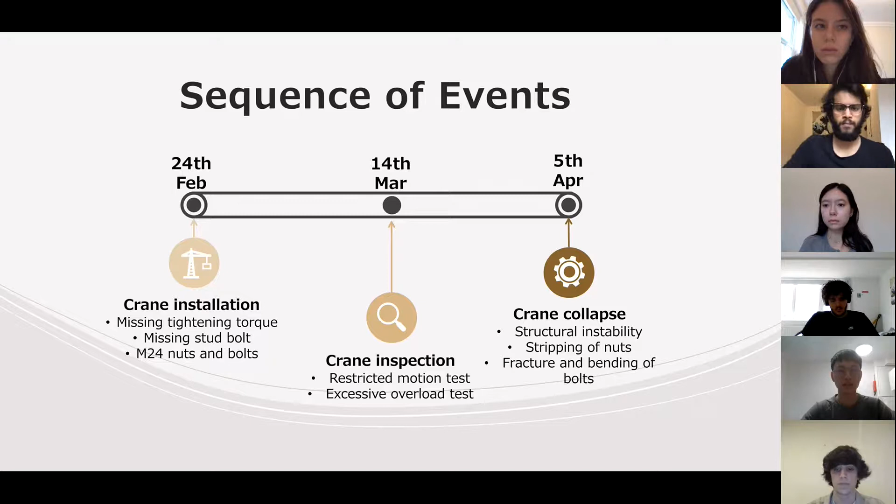On 5th of April, around midday, during lifting operations carried out by the crane operator, Mr. Tatton, the crane fell and injured the operations manager, Mr. Vance.

In studying the cause of the crane collapse, several factors were analyzed. Force and moment calculations showed that the crane was not overloaded at the time of the incident, thus should not have failed at the weight lifted. Checks on the tightening torque used on the bolts showed that the bolts were sufficiently preloaded to a value of 135 kilonewtons, which is greater than the incident load of 120 kilonewtons.

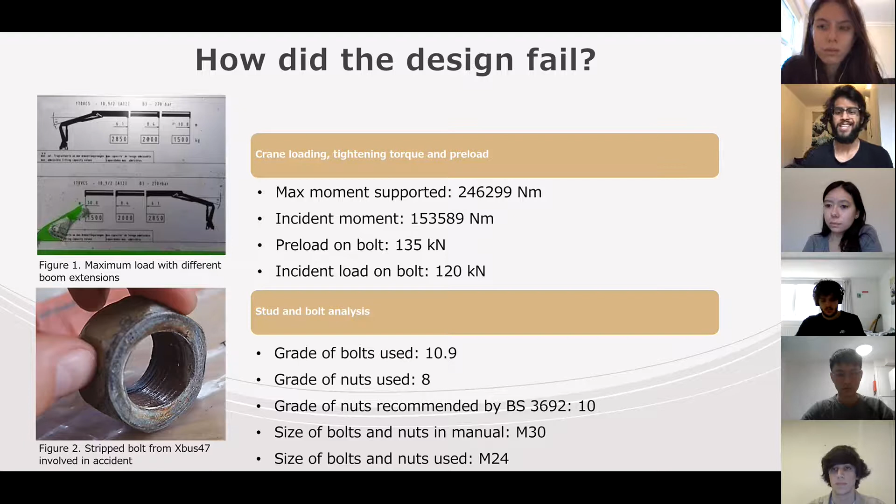Looking at the bolts and nuts used, it is found that the grade of the nut used for the bolt was not in compliance with national standards, as a lower grade of nut was used with a higher grade bolt. Furthermore, the size of the fasteners used were not the size indicated in the installation manual. It is concluded that these factors caused a chain reaction which led to the collapse.

Regarding the maintenance and operation of the crane design, the crane inspector carried out an overload test with a load of 2,000 kilograms, which exceeded the intended load by 125 kilograms, possibly contributing to the failure of the nuts. Also, the bolts did not get retorqued following the overload test, causing possible loosening of the nuts, followed by reduction in their preload values.

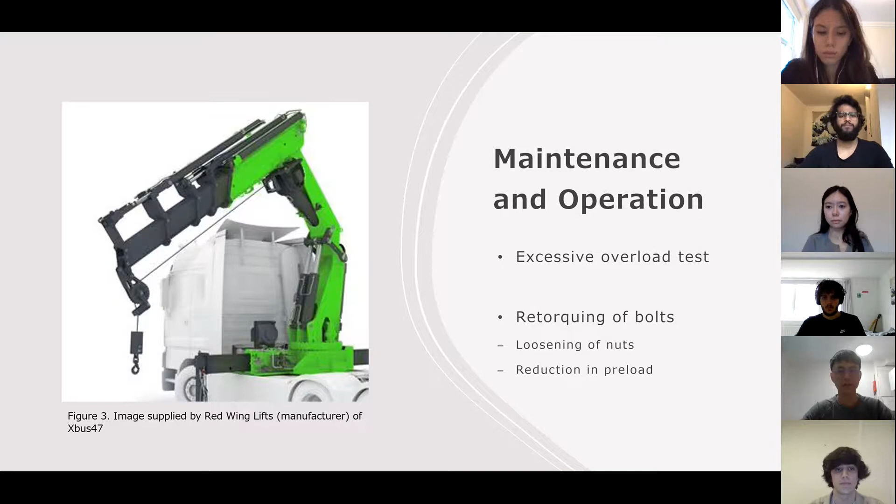Furthermore, for the legal aspect, we assess Xbus47's compliance with the Lifting Operations and Lifting Equipment Regulations. We concluded that the main regulations not complied were Regulation 4, being not to exceed the limits of strength or stability of the lifting equipment. This was not complied as the crane's new base was installed on the old plinth without checking the integrity of the original structure. Additionally, Regulation 8 clarifies that each lifting operation needs to be planned, supervised, and carried out safely.

This was not complied as the crane was operated while the driver and Mr. Vance were under the load and the maximum load limit was not reduced to a safer limit as asked by Hytrick Crars. Finally, Regulation 9 requires all lifting equipment to be subject to thorough examination at various points before being used. This was not complied as Xbus47 was used before commissioning and Mr. Striple, being the competent person, did not properly check on torque or bolt suitability.

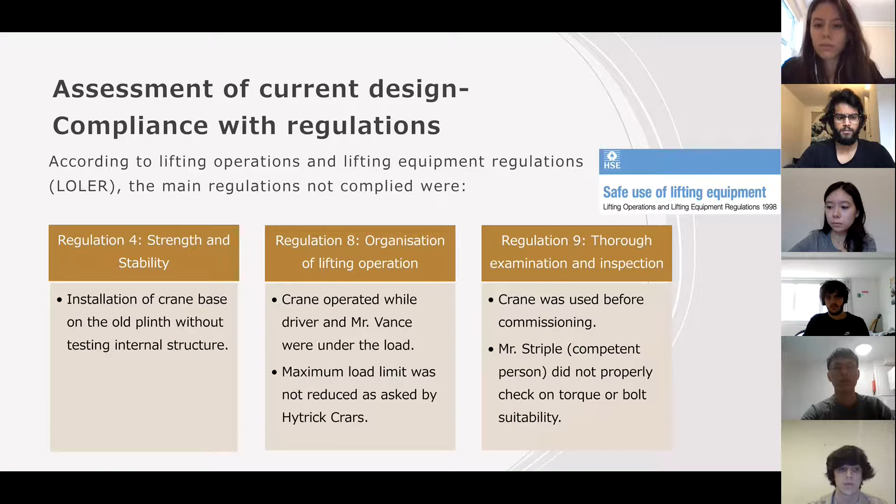A new PDS was created where we will talk about 5 main aspects of this new design. It must offer a better stability on the base, as well as safer working conditions. It should be installed when Hytrick wants to continue those operations. Safety is an important factor. Indeed, we considered the risk on the workers' health, and to answer to this criteria, we created an extended safety zone with a fixed radius.

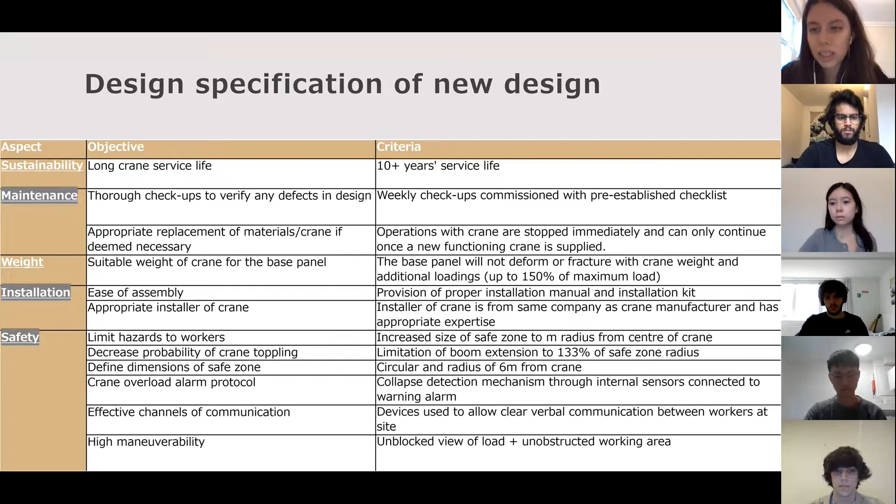Then, the new design will depend on its installation. It must be easy to assemble with fixed instructions and measurements. The maintenance must be considered, and it must be verified through checkups with a pre-established checklist. Furthermore, commissioning is crucial as lack of it can cause failure of a crane. Different objectives can be set, such as realizing to full extent different tests, such as the 360 range motion. Finally, the performance must be considered, such as setting a precise load capacity without overloading the crane.

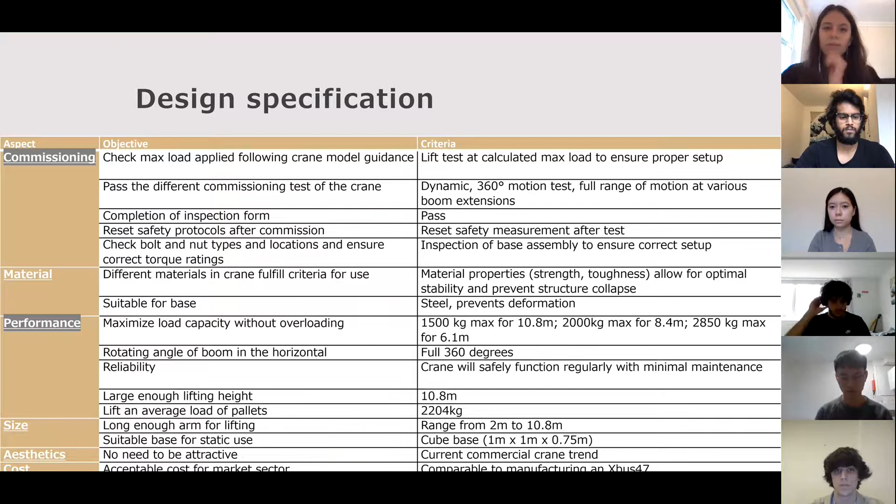When we were looking at our old design, we found that the main issue was the dependence on the bolt joints for stability. We therefore decided to add hydraulic stabilizers so that the weight of the crane and the load will be distributed between the four stabilizers as well as the bolts. The hydraulic supports are composed of a piston mechanism, which also has a pressure gauge linked to an alarm system.

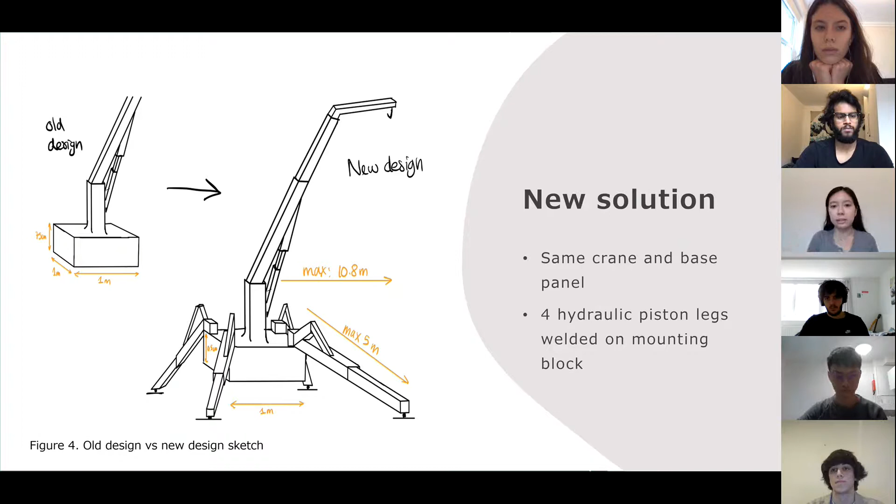As we want the solution to be safer, we wanted to check if the four stabilizers would be able to hold the full weight of the crane and the loads if the bolts were to fail again. So here's our free body diagram that we use for our calculations. We can see that we simplified the crane, and we now have three different weights. Weight 1, which corresponds to the mounting block, which is made of steel. Weight 2, which corresponds to the weight of the crane. And weight 3, which corresponds to the weight of the pallets.

We can also see theta 0, which corresponds to our boom degree angle, which is in the middle of the diagram. And we can also see that we considered four normal forces, drawing them such as A is composed of A1, A2, B is composed of B1, B2. Our measures are these specific distances because we considered our new safety measures. So this scenario is therefore in the case where the boom of the crane is at its maximum length of 10.8 meters.

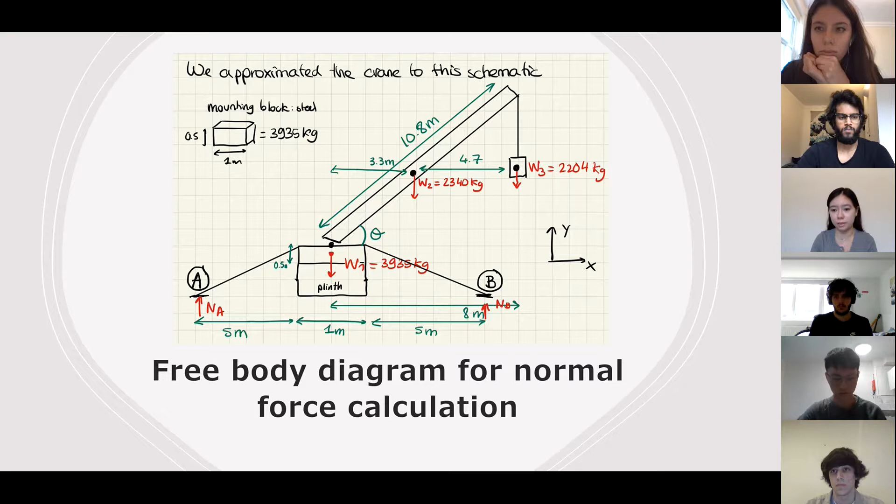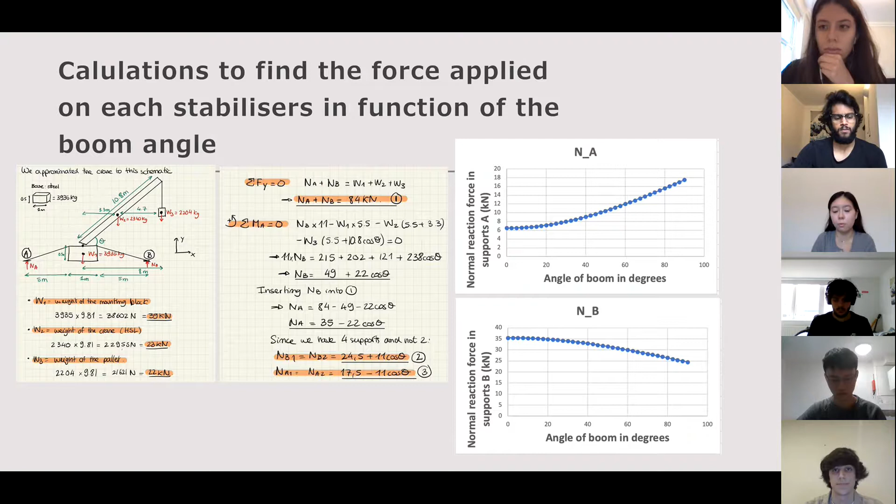We then proceeded to find the reaction forces and moments in A equations. From those equations, we then obtained the equations for the forces applied at each stabilizer in function of the boom degree, which is what we plotted in the graphs. The new design uses a hydraulic system to fix the displacement of the crane. It relies on the use of fluid pressure to transfer force to extend and retract the legs as necessary. The system is further capable of withstanding shock loads without moving the leg, thus can act as a stabilizing system in the case of failure.

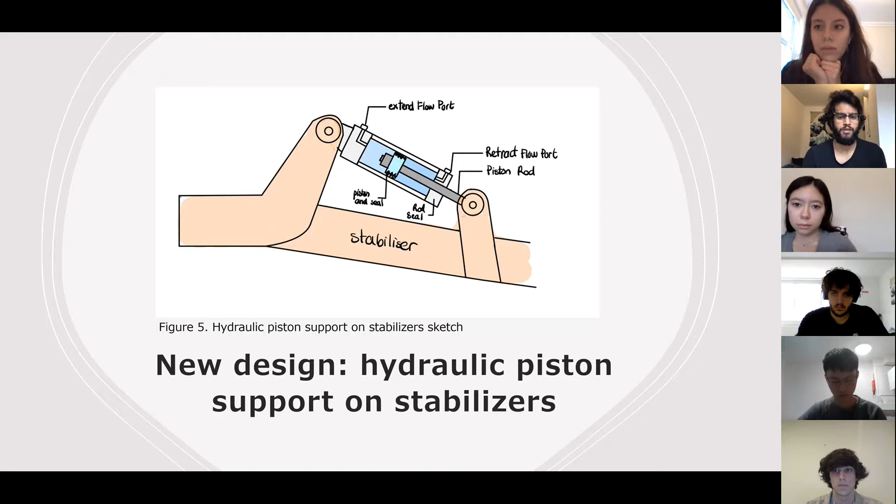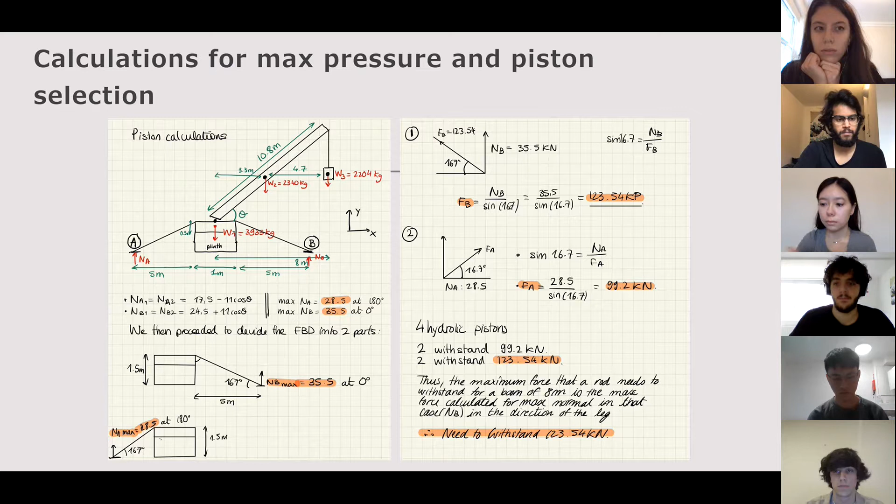So as we can see, for the calculations for maximum pressure and piston selection, we have to resolve both the normal at A and the normal at B into resultant forces into all of the legs. As such, we were able to calculate the maximum force that would be experienced by the leg to be 123.54 kilonewtons. Thus, the maximum force that the leg would withstand is 123.54 kilonewtons. Therefore, we selected a hydraulic piston accordingly.

We used a piston bore diameter of 0.1524 meters, and as such, we calculated the maximum pressure in the piston to be 67 bar. Existing hydraulic cylinders can handle a pressure of 210 to 690 bar, and specifically the Parker HMI, which we selected, operates at a max operating pressure of 210 bar, which is more than enough for what we actually need.

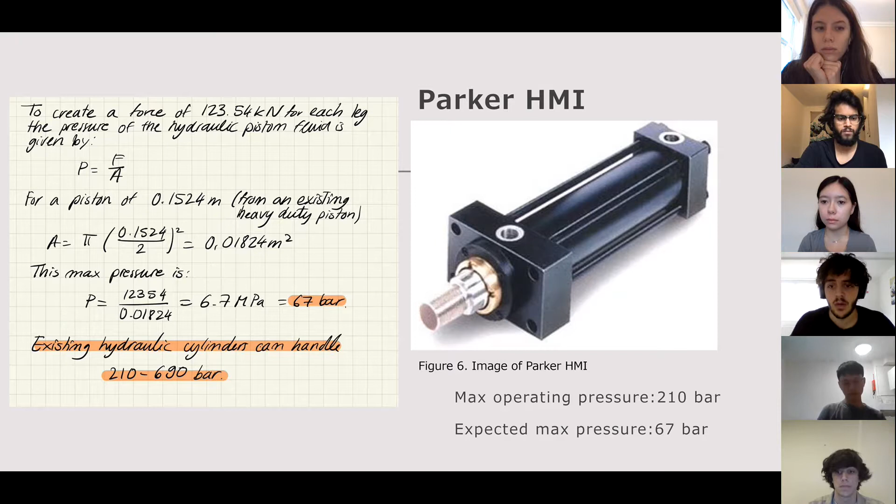Finally, we thought that the safety provided by the new crane design was limited, and thus we considered new external safety measures. This consisted of adding a 6-meter safe radius from the center of the crane, surrounded by a 1-meter high gated perimeter. This would ensure clear indication of the restricted loading zone and thus prevent any worker from getting inside. It would also be large enough to reduce the risk of an accident in case of the crane's full mechanical failure. Finally, we've designed a conveyor belt system to load and unload the battery pallets safer.

How it works is when the truck unloads the batteries, a worker unhooks them from the crane, placing them on the old battery area shown on the left of the diagram. These batteries will be transported to the middle area of the conveyor belt as shown on the diagram, where the conveyor belt would be stopped. The forklifts would then be used to collect the old batteries for recharging, and similarly used to place the new batteries on the conveyor belt to load them on the truck.